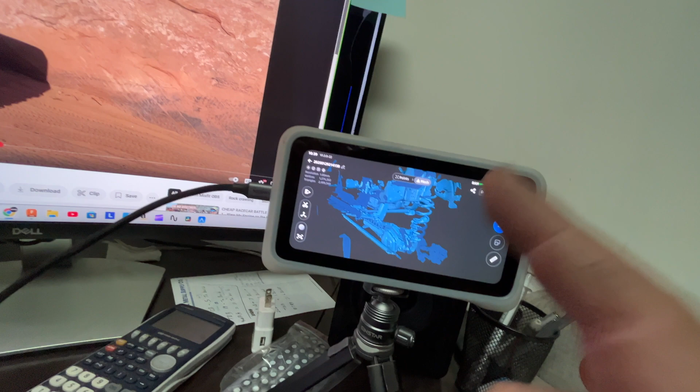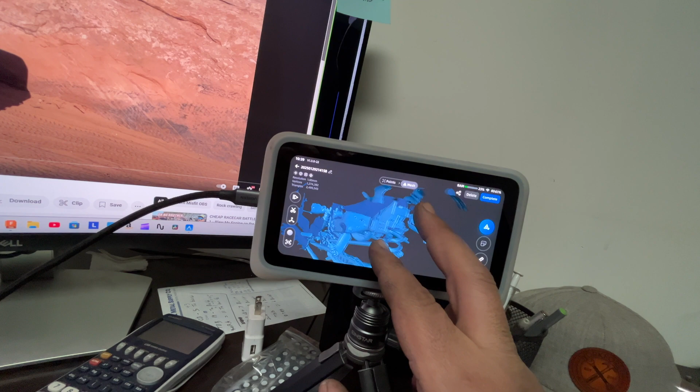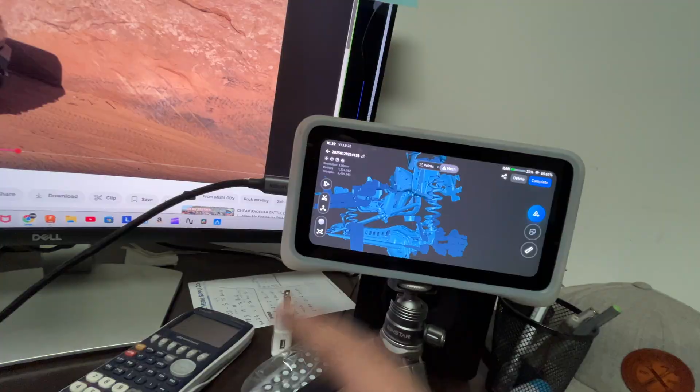Like, this scan took me maybe a total of like 5 minutes to be able to capture. And now we have it imported into our design space on Fusion 360. And again, I know that it might look a little bit rough, but it's an amazingly good scan.

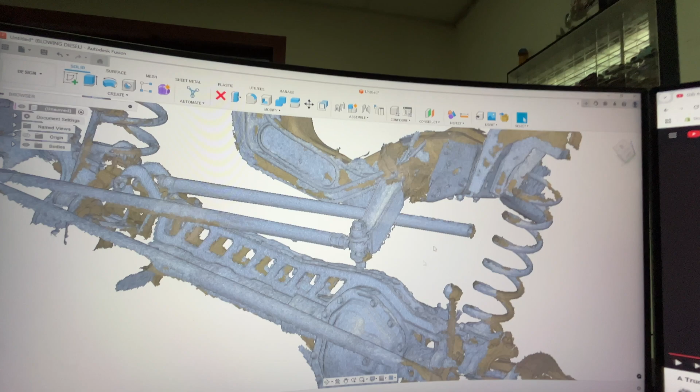And essentially what we're gonna do, as you can see, we have that pitman arm that we were designing and building in the last video, our double shear pitman arm. We threw it on the truck so that we can make a mock-up drag link. So this drag link is actually made out of PVC right now in the truck. I'll go show you guys here in a little bit.

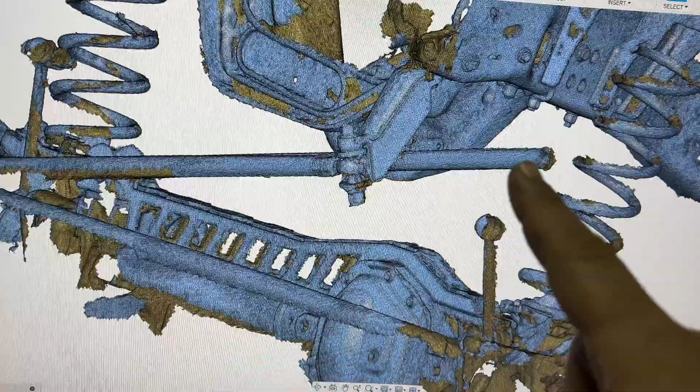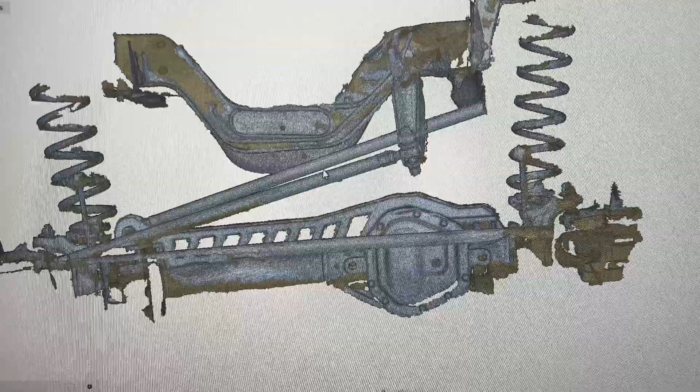But what it will do, let me zoom in a little bit, is allow us to make our track bar bracket and make it match the angle that drag link is going to have, which is the important thing. Again, I've mentioned this before, but in an ideal world, you want your drag link and your track bar to be at the exact same angle and to be the same length. So our goal is going to be to try and be as close as possible to those two things.

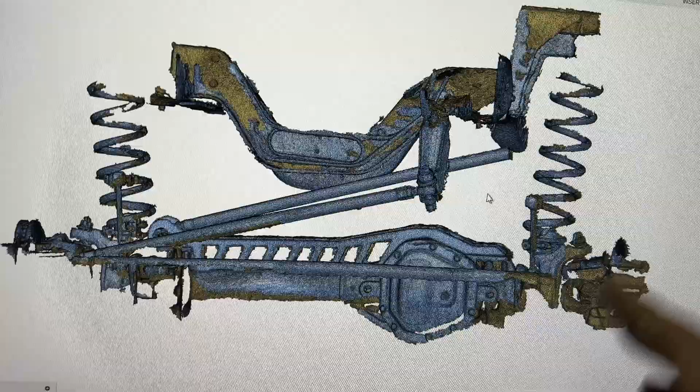And again, that's why it was really important to design this pitman arm and get it on there, because that's going to dictate the angle of the track bar and where we got to put the track bar bracket. So again, the goal is to make the track bar as long as we can make it. Well, hopefully as long as the drag link, and then have the same angle,

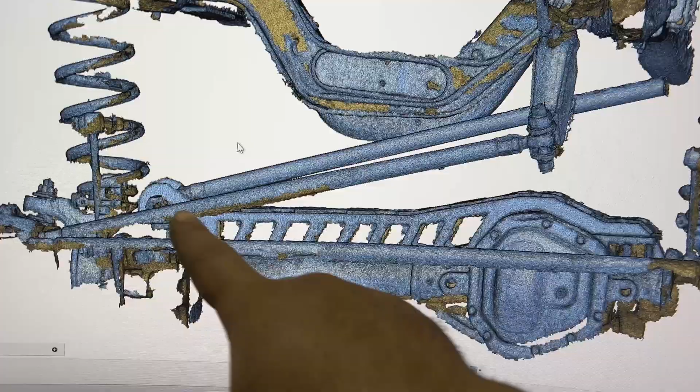because as you can see, the mock-up track bar that I had on there is a little bit taller on this end, but what I'm going to do is actually raise this end a little bit to try and match this angle, and I'll try and record some of this process.

So I've been asked a lot by you guys to try and show you how I design things. Here's the thing. I don't know the proper way to use Fusion 360. I'm self-taught, and with that comes a lot of things done wrong or not properly like you should. Like, I don't use constraints the way that they're supposed to be used and all that stuff. I have a lot of workarounds in order for me to do the stuff that I need to do, but I'll kind of try and take you through the process, I guess, of designing.

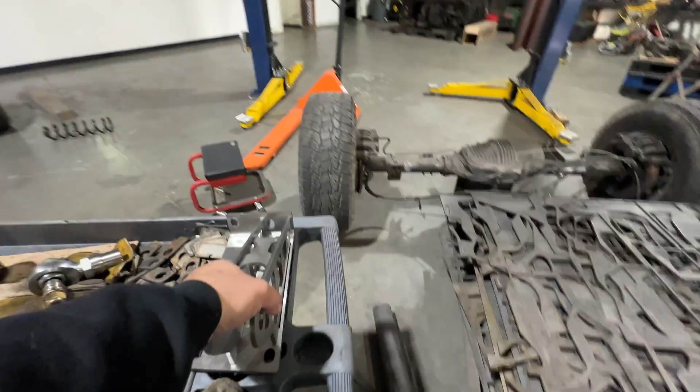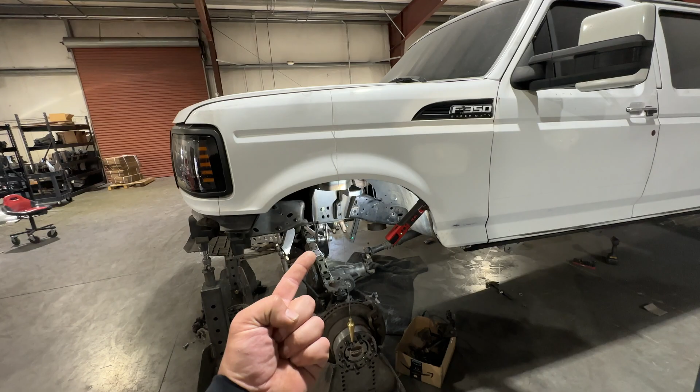So like I was showing you in the rendering on the computer, we have our track bar bracket done. And this actually isn't even our final track bar bracket. This is just the first prototype that we made. Figured out a couple things that I didn't like, and then we made that one. So this is fitting a lot more like I want it to. It fits the frame a lot better.

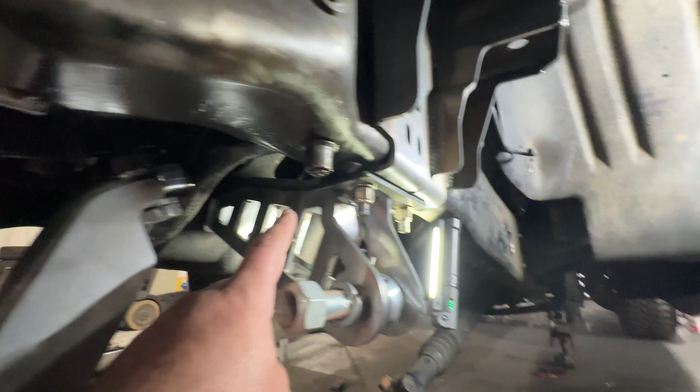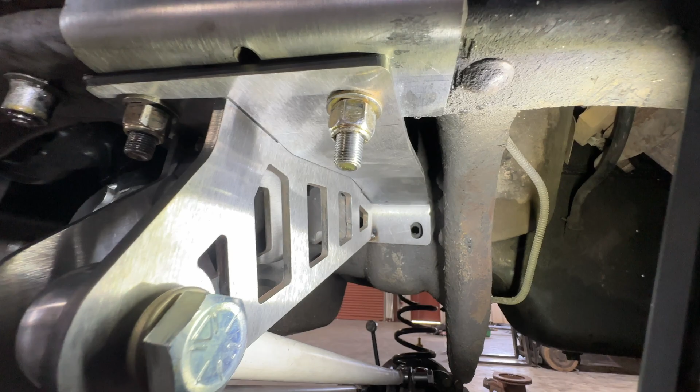I don't know if you can tell, maybe from the side that the light is on, but we added a couple bends to the bracket. So here and right there, so that we could actually be right in line with the hardware that we want to try and use. And it lined up perfectly. We also raised it up just a little bit more to have the best possible angle with the drag link, and to keep it as centered as we can with the other side of the track bar.

And honestly, I'm pretty happy. I'll try and do a better comparison on the angles, but I think we nailed it pretty good. We also, as you can see, made a new truss for the axle, just because I didn't like a couple of things of how it was fitting. This one is also fitting perfectly. We did add a little bit more clearance around the pumpkin, just because it's not getting welded there anyways. So we just want it to look good and not be too tight.

So we have the new track bar bracket up top. Technically the bottom track bar bracket, the truss on the axle done. Double shear pitman arm done. Well, I guess I can't say done. We have what I think is going to be the final prototype done. We'll call it done once everything is fully welded and finally installed on the truck.

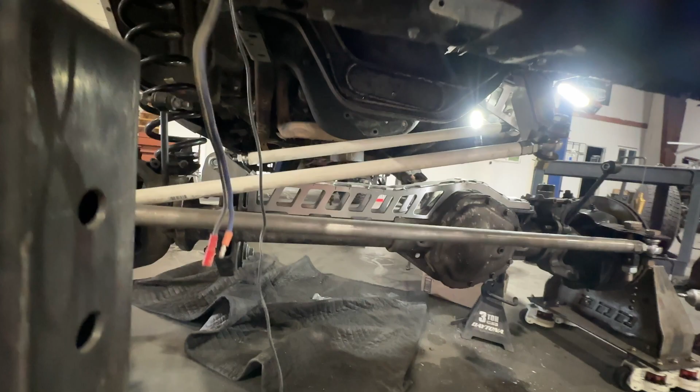All of this right now is essentially, I guess you call it a mock-up, to make sure that everything we're building is going to work the way that we want it to work. Again, the first set of prototypes obviously wasn't perfect, wasn't exactly how I wanted it. That's why we came back, we redid them, and we're a lot happier with them. So again, it's going to be kind of hard to show you the angles, but they are basically perfect between the drag link and the track bar.

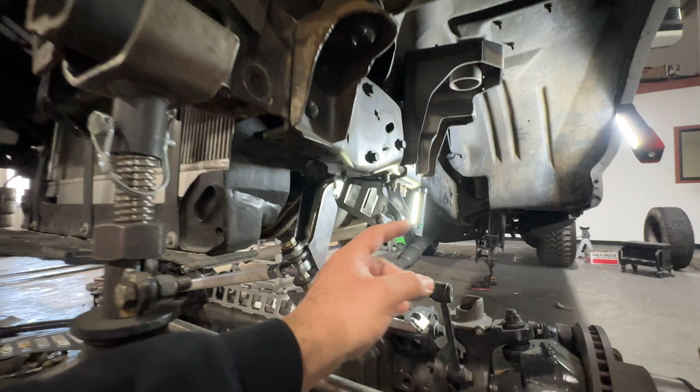We were also able to get both bars pretty close in distance. As you can tell, we've got a pretty big offset over here. But on this side, we also have a pretty decent offset. The track bar is still a little bit shorter than the drag link, but we have it to about where I want it, where it'll work good and it won't look too goofy, because we don't want this side of the track bar sticking out way past the frame. And again, right there where we have it is perfect.

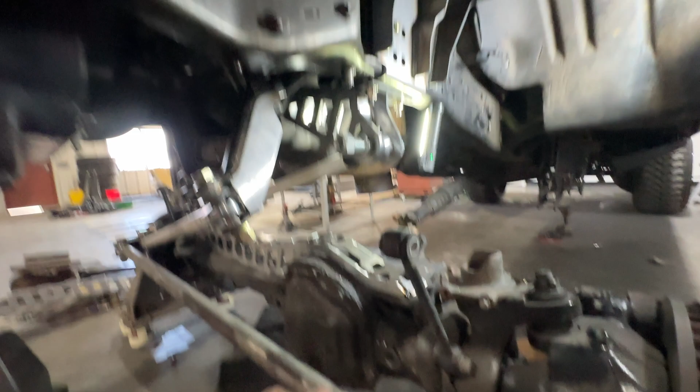Everything should have plenty of clearance moving up and down, all of that. Plenty of travel. I know that actually might look kind of tight, but that's still at least 6-7 inches, so that should be more than enough. Plus, where the truck is at right now isn't even going to be the lowest that this thing should technically be used for. We're planning on this being like an 8 to 12 inch kit, and where the truck is sitting right now probably wouldn't even be the 8 inches.

I was actually messing around with the springs yesterday, and this truck's actually going to be sitting at least 2 to 3 inches higher than where it's at right now, which is crazy. I know, this thing's going to be ginormous. It's by far going to be the biggest build that we've done in this shop. I had kind of set it up to about where Dirty Girl was at, which up to date has been the biggest build that we've done here. So I'm like, yeah, I'm pretty sure it's going to land about where that truck was at.

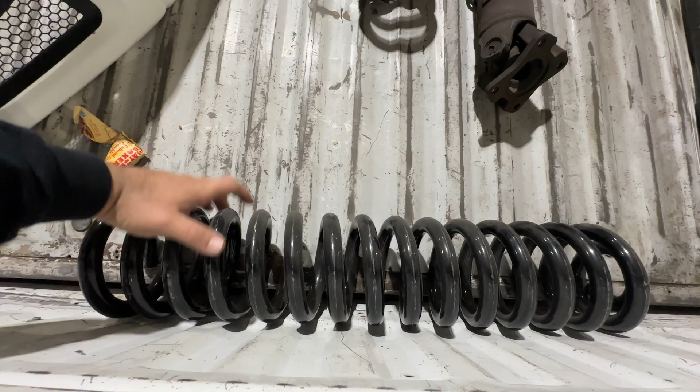Boy, was I wrong. Like I said, I was messing with the lift springs that Bryce brought me, which he said were 8-inch springs, I believe. They are these bad boys, which again, ginormous. And like I was saying, I was messing around with them to see about how close I was to it, and it was like this far off. Obviously once the weight of the truck is on, it's gonna compress them a little bit, but I'm pretty sure it's going to end up a little bit higher than where it's at right now.

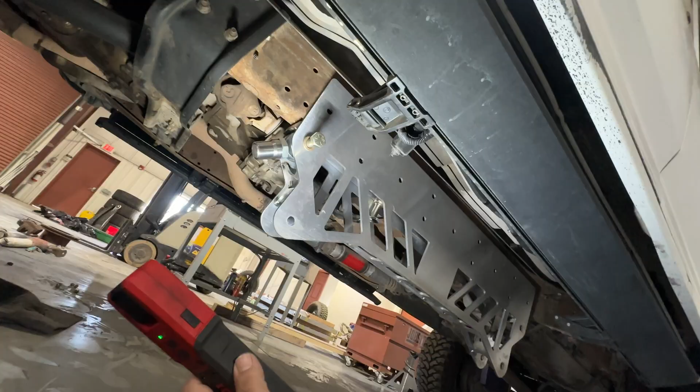Another thing that I want to show you, it's kind of poking out under the truck, is the actual cradle. We have the first prototype of the cradle on the truck. That's a better view. So again, we have the first prototype of the cradle under the truck, and this thing looks mean. I am super happy with the way that it looks, the way that it's turning out. There's a couple things that we got to modify, but we needed to make the first prototype to test it on here and see what it was going to do, and we definitely got to modify a couple of things.

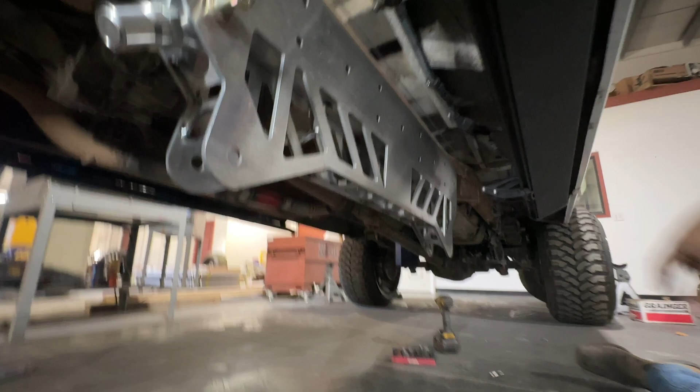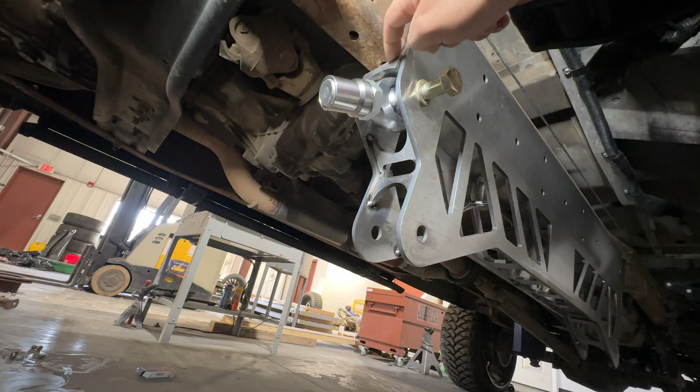The first one is that we actually got to lower this about 1 inch, I think, for it to look better, maybe a little bit more. And for this to have proper clearance, the heim joint is actually rubbing on the top part of the cradle, so we got to drop basically this whole pattern down at least 1 inch. Plus, by dropping it, it'll actually make it more visible and look better. So I think it'll be a win-win. So we're gonna drop it 1 inch, maybe 2, make it look a little bit beefier.

And I'm also contemplating if I want to make it longer, kind of make it come a couple inches further forward. This cross member is going to be going. We have a CFI cross member for this thing that we're going to be using, so we're not going to have this anymore. But anyway, that's kind of what I'm thinking. Maybe bringing it forward 4 inches to where it's about like here. But again, I still gotta figure that out, see if I actually want to do that or not.

Because one thing that I was noticing with this truck is it's obviously a pretty long truck. It's a crew cab, long bed, and the bottom links, it might not look like it from the video, but they're gonna be quite long to make it all the way to the back. And same with the fronts. I feel like they need to be a little bit shorter. It'll make everything work together a lot better. But it's still something that I gotta sit down on the computer, design, talk to Bryce too, see what he thinks. But other than that, it's looking mean. So what I'm gonna do now is jump back on the computer, mess around with that, see what I like, and we'll go from there.

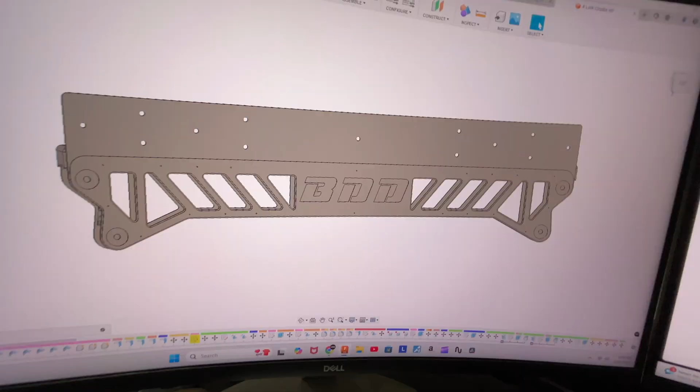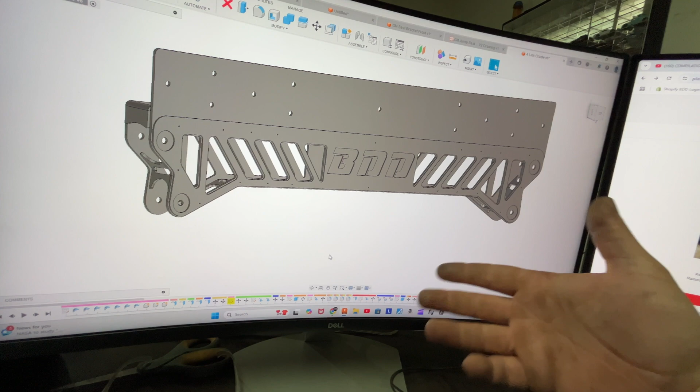Okay guys, so we're back in the office because I want to show you the design of the new cradle. So this is basically what it's gonna look like. We made it longer by 16 inches. We also dropped it by about 1.5 inches, and it's gonna look pretty freaking cool. I'm still playing around with the logo, so that's not gonna be the final version. But as you can see, we also added quite a bit more space for a bigger, better looking logo on the cradle.

Now, I want to go outside because I want to talk about something. Unfortunately, earlier today, the plasma table caught on fire a little bit, and I just got done fixing it, but we're out of time for today. But I want to show you the little oopsie that happened.

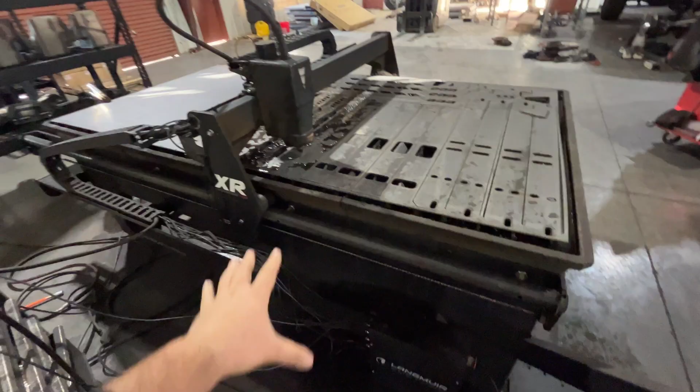So I had the plasma table running, and you know, I've gotten pretty good with this to where I know when I can leave it and when I can't. So I had it cutting. I left over to the press brake to bend a few things, and then I start smelling a burning plastic sort of smell, and I'm like, man, something's on fire. What the heck is that? So I looked over here to the plasma table, and sure enough, there was black smoke coming from this corner of the table. So I ran over here, put out a fire that was coming literally from the cables.

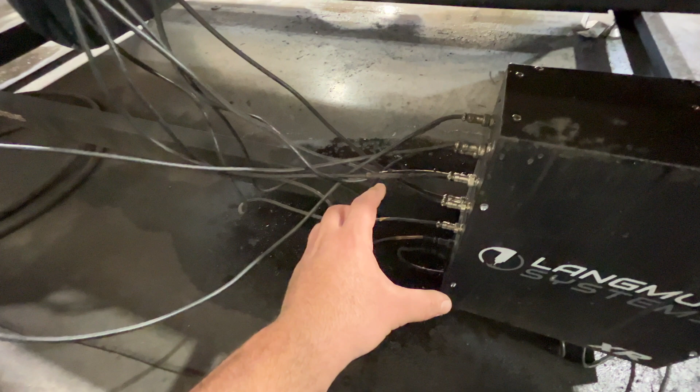So what happened is that I had, you know, some labels on the cables that I just put on there with tape, with like painter's tape. And obviously, me in my infinite wisdom never thought that it's paper. And there's obviously sparks right here. So I guess a few sparks fell on the papers, caught it on fire, which proceeded to catch the actual cables on fire. So a couple of them melted. I had to spend a little bit of time fixing that. And again, guys, luckily I was able to get it fixed, get it up and running.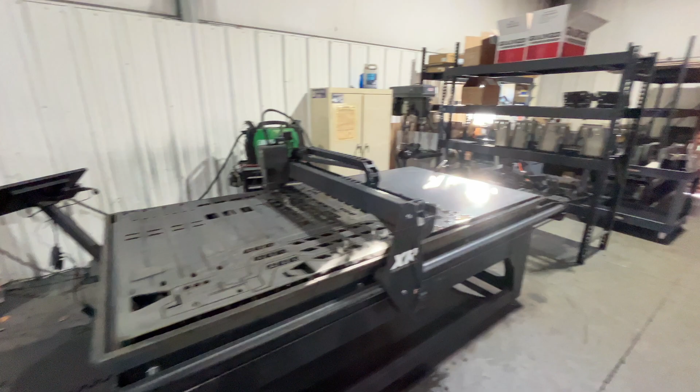And as you can see, we've got a whole bunch of cross members getting cut. I love this view of this thing when it has a whole bunch of things cut on the table. It's gonna finish cutting the whole sheet. But again, super cool.

And then since I wasn't able to finish that full video, I'm gonna talk about a couple things that are gonna be coming on the website. One of them is already on the website, which is our shock brackets for the Sterling 10.5s. And again, this is another one of those parts that is intended to hopefully make your swap a lot easier. If you don't know, the 05 Plus axles, I think actually all the Super Duty axles, have the shocks where one faces the front and the other faces the rear. The OBS axles, they both face the front.

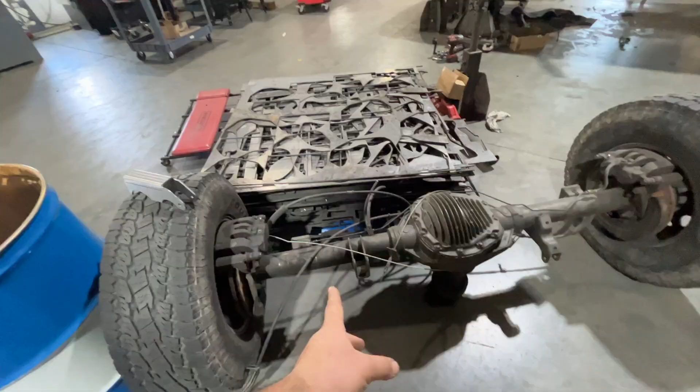So when you do the swap, if you got the 05 through 07 axles, the shock tabs are mounted with U-bolts, so you can just flip those around. But any of the newer axles, like Bryce's right here, as you can see, the shock tabs are actually welded on. This is the driver's side. So you gotta cut off the driver's side bracket and then weld the new one on. And basically that's what this is right here. This will allow you to weld your new shock tab in the correct position.